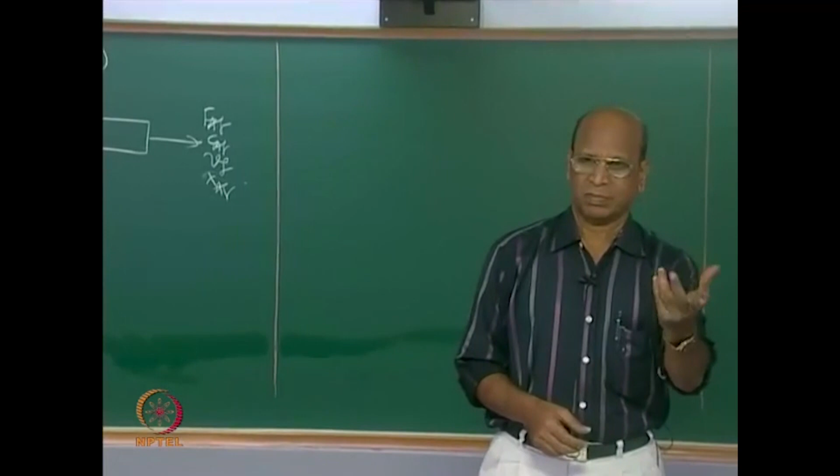Here also I can calculate tau, no? In this also we can calculate what is the residence time required for certain conversion, and residence time is equivalent to volume, correct?

And of course we are talking about only reaction time. When you compare plug flow and batch, you are talking about only reaction time, right? The other times you cannot take. So definitely plug flow is better in that case, because it is continuous. You do not have to discharge, refill, or do all that - once you start, years and years you can run the plug flow reactor all the time. But physically, can you say why both are giving the same result under certain conditions?

And to give you the clue, the condition is constant density system. Under constant density system, why is the performance the same? Can you imagine something? You have to extend your imagination. You already know that plug flow is equivalent to batch under some conditions.

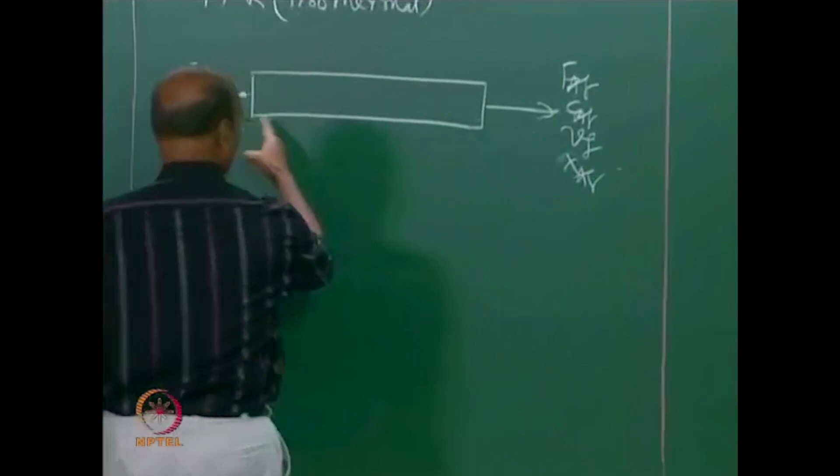But normally you should have a question - that is a batch reactor, this is a continuous flow reactor, why same? Mathematically if you calculate, you will get the same timings or same conversion for a given time. You get that. But did you think a little beyond just that this question will come in the examination, so let me do somehow? Simply, here length by velocity coordinate is replaced by...

Length by velocity will give you what? Time. That time, if it is just replaced in a batch reactor time, both are exactly same. That means the time here with respect to space is equivalent to the time of reaction.

So that means if, let's say, 10 seconds you are here, you can have some conversion, you can find out what is the conversion at this point, and the same 10 seconds if you wait in the batch reactor, if the constant density system is there, you will also get the same conversion. How do you define plug flow?

Same residence time - every molecule spends the same residence time. Here also same. In batch reactor, what will happen? Same. That is the one simple concept.

In batch reactor, you are not allowing those fellows to escape, and you are waiting for either 10 seconds or 20 seconds or 100 seconds. You are arresting them - they have to be there.

Whereas here, by definition, for a certain reaction - say 90% conversion or maybe 80% conversion - to occur, you also need certain time here. And by the definition of plug flow, all the molecules have to spend exactly the same time in the plug flow. Whereas in batch reactor, there is no way for the molecules to escape, so all of them have to spend exactly 10 seconds to get this 90% conversion.

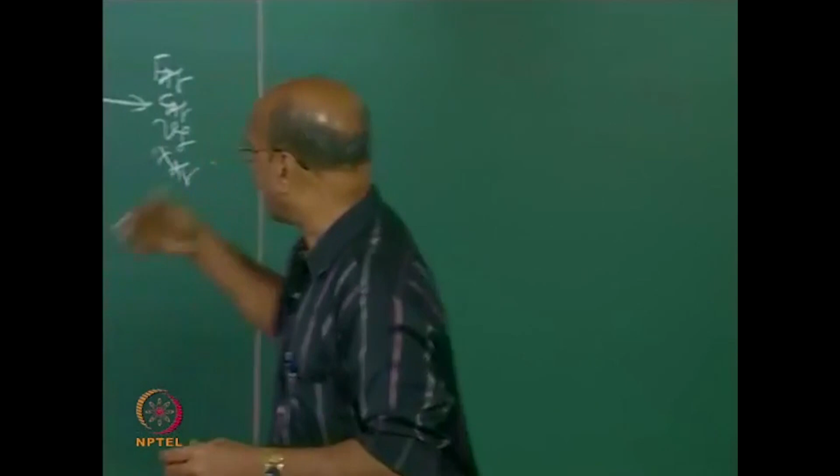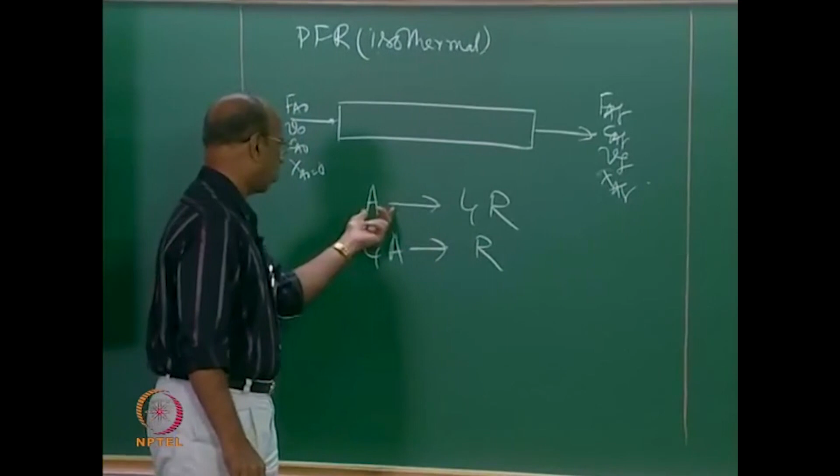So in the variable density system, particularly for gas phase reactions, when there is a difference in moles - that means either 1 mole giving 4 moles, or this may be reverse also - this is also density, change in density, but here you will have less volume at the end, because 4 molecules giving you 1 molecule, whereas here 1 molecule giving 4 moles.

And then you also know that at NTP, STP, 22.4 liters it will occupy - all that we know. So then we can easily calculate under given temperature and pressure conditions what will be the increase in volume. What will happen now inside the plug flow reactor when I have this kind of situation? What will happen?

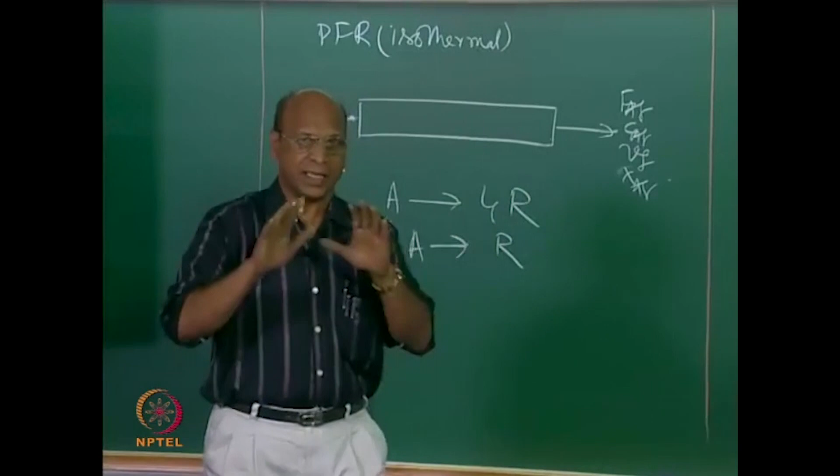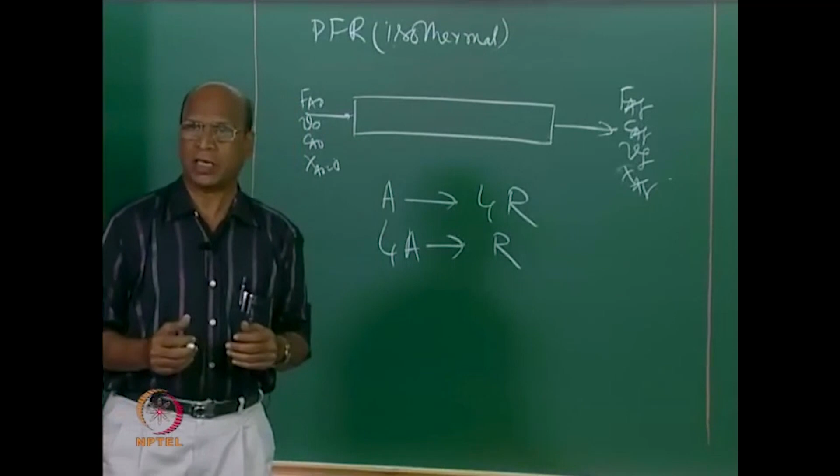Why? Because let us say 1 mole gives 4 moles, suddenly all that volume is not increasing instantly. That volume also depends on how much conversion. Depending on conversion, if I have 10% conversion here, the volume expands so much. You can calculate that. If you go slightly inside, maybe conversion has come to half, for example 50% conversion, you can also find out what is the volume.

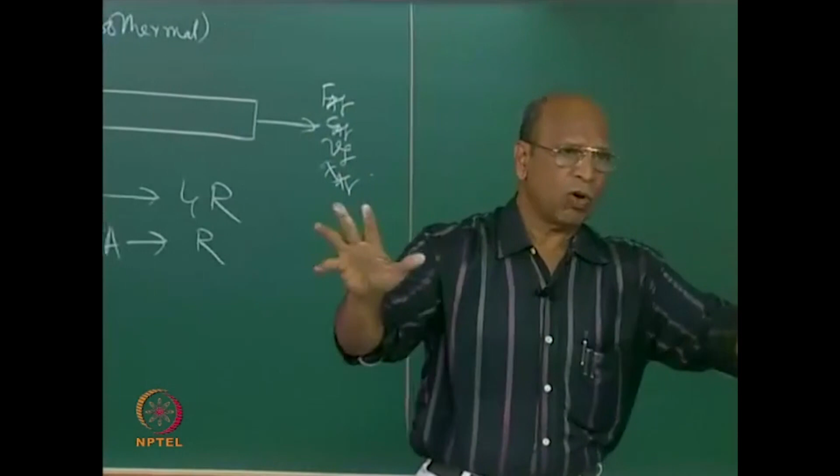That volume, because pressure is constant throughout, has to reflect only in acceleration, right? Because there is a continuous flow, there is a way for these molecules to escape. On the other hand, in a batch reactor, same reaction I conduct. So 1 mole will give me again 4 moles there, no escape, so everything is shut and constant volume, because I am taking a rigid batch reactor, rigid, meaning walls are very, very strong.

So then what will happen? Pressure increases. In fact, that is the technique used by Levenspiel to measure kinetics for gas phase reactions. You can find out, depending on conversion, what is the increase in pressure, not volume, batch reactor total pressure. Now from total pressure, if you know the components, you can find out partial pressure. So using partial pressures and time, you can also find out the kinetics, whether the reaction is first order or zero order or no order at all, and the format of the rate equation you can get from that data.

That is why beautifully it is used, and it is also possible, it is a crazy idea, to have the variable volume batch reactor. How do I do that? I will take a balloon where the elasticity is very, very high, so it easily expands.

So when I put this 1 mole and have the conditions for the reaction, at the end of the reaction, if I wait for almost 100%, what will be the volume of the balloon now? 4 times, freely expanding, without any resistance. So even that information can be used for finding out kinetics.

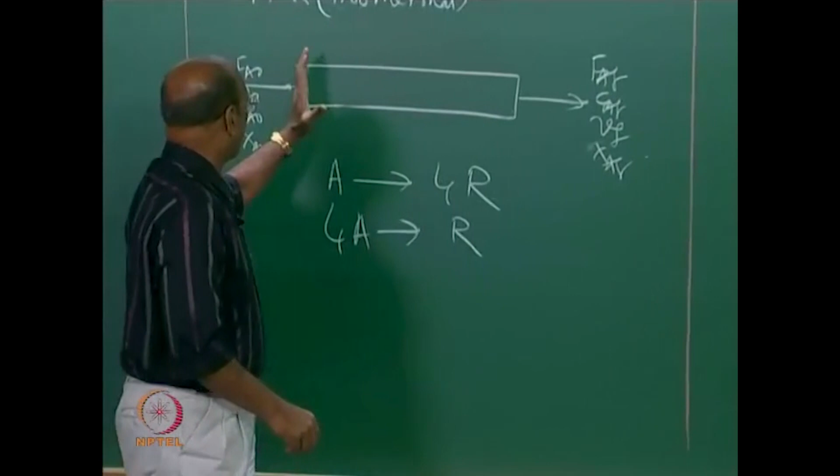But here for our discussion, what we have to see is, when I have the gas phase reaction in plug flow, the gas expands and then it moves faster. So when it is moving faster, the residence time of those molecules will be less. So for a given volume, conversion will be less. For a given volume means for a given τ value.

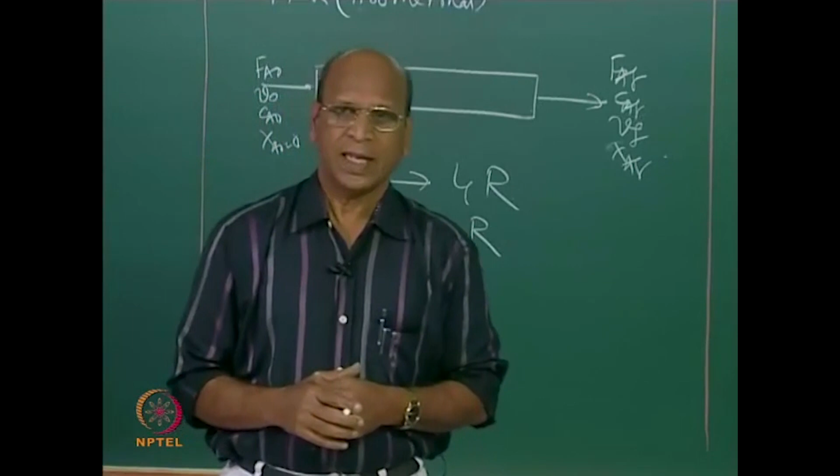So that also you should have calculated: that means for variable volume, what is the conversion, and for a given time, or for constant volume, what is the conversion. Because in variable volume, particularly when you have 1 mole giving 4 moles, the gas expands. What happens to concentration? It decreases. When concentration decreases, rate of reaction will be less. So when the rate of reaction is less, then more time is needed.

You see, you don't need any expressions at all, you don't have to write an equation for each and everything. First, I think like a story you have to discuss it. Then if you want to exactly find out what is the exact conversion, or what is the exact time for a given conversion, that means when numbers come into play, then you have to use mathematics. Otherwise, to explain the subject I don't need mathematics.

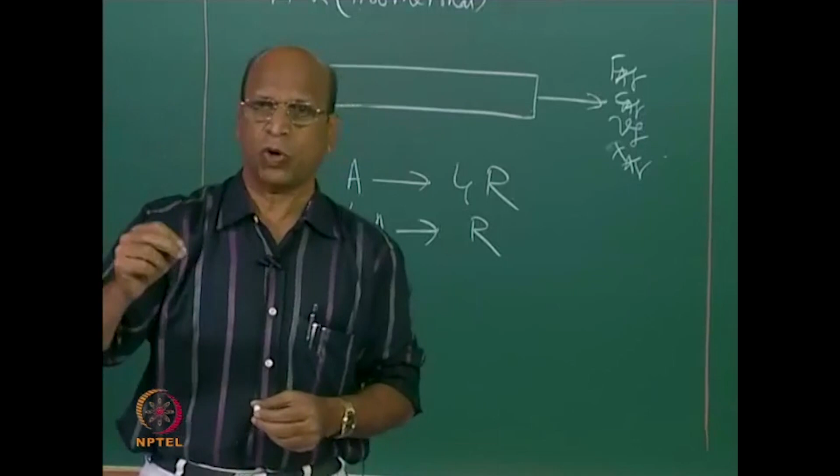But please remember, in engineering mathematics plays a great role, because every engineer has to quantify anything. At the end, when you are saying that my reactor volume is 1 meter cubed, people will ask you why. You cannot simply say, like only gods can say, use 1 meter cubed, and you can't question them because they are gods.

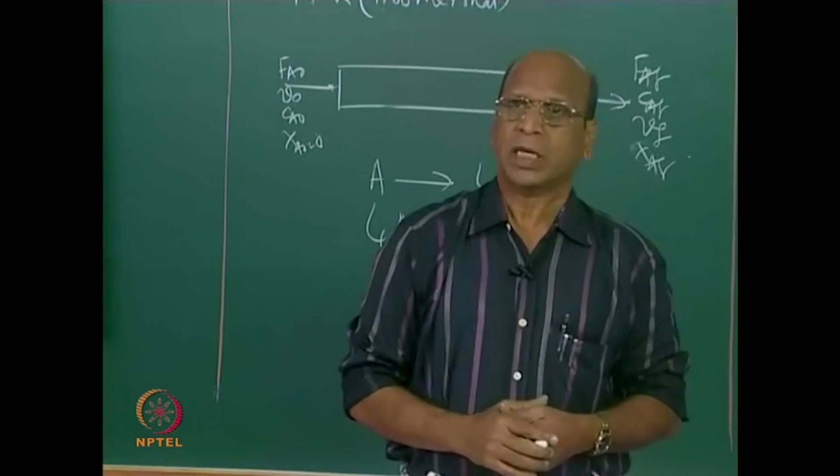But if I give that, 100 questions will come: sir, why 1 meter cubed? Like I already told you, no, I told 7 meter cubed, you say 0.7 meter cubed, you question me. That means to prove it I need mathematics, and then I have to say whether you are right or I am right. For that, mathematics comes into picture. That is why mathematics and engineering are inseparable. Medicine can escape this to some extent. Otherwise, there is also a tremendous amount of mathematics in medicine as well.

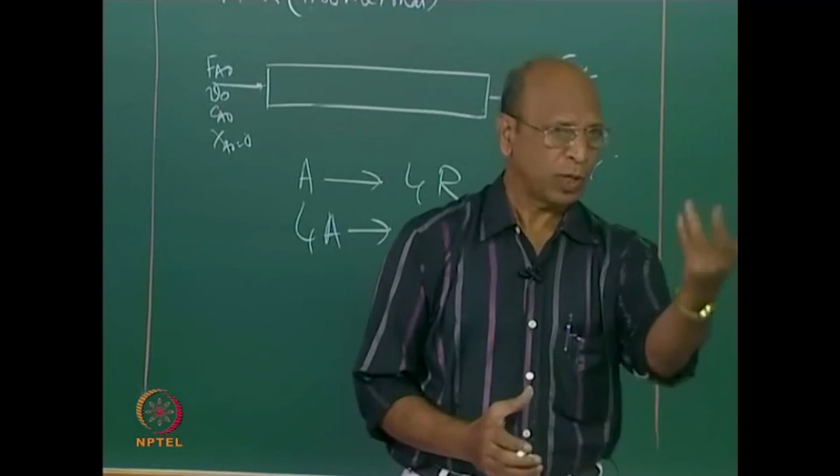When they go to research level, to give an aspirin tablet, we don't need any mathematics, because we also know when to take an aspirin tablet, all of us, even without being doctors. So that is why the mathematics part comes only when you want to quantify. Please remember that as engineers, quantification is a must.

I am not talking about a reactor, anything. I think the heat exchanger area is, say, 10 meter square. How do you get 10 meter square? You have to calculate. You have the heat transfer design equations, right? Same thing for a distillation column, anywhere you go, mathematics automatically comes, because you have to finally tell that this is the diameter, this is the height, this is the composition, all that.

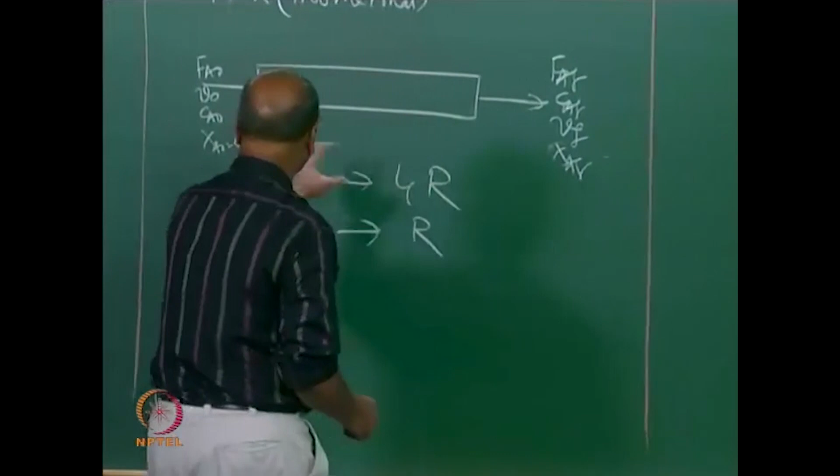Good, okay. So now I think you know the difference between the batch reactor, when you will have different conversions for a given volume, or when you have the same conversions. So that is one information which I want to tell you.

So the other information is the design expression for this now. How do you write the design expression depends on what kind of system you have. Have you heard of what is called a distributed parameter system and lumped parameter system?

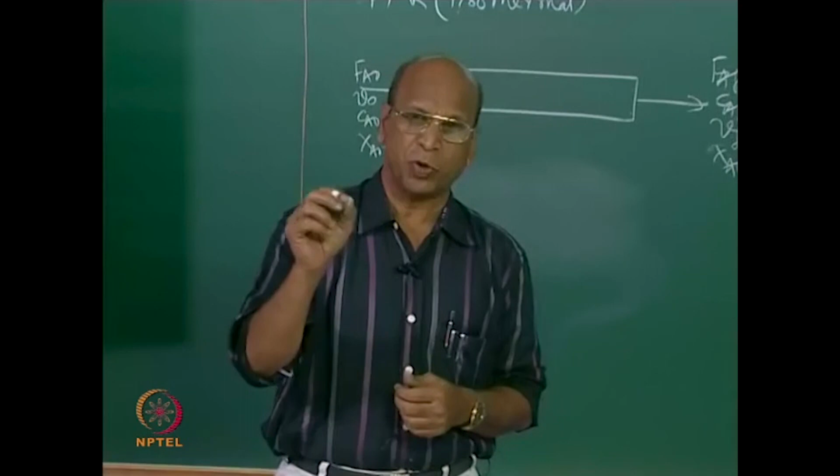Okay, this comes as distributed or lumped. What is distributing there? I want you to have perfect understanding, so that is why I am asking, what is distributing there? The concentration, and if it is non-isothermal, temperature is distributing from this end to that end.

Whereas in a mixed flow reactor, when you want to write the balance, you only know what is entering at the inlet, and what is leaving at the outlet. But in between, if you want to write the balance, you cannot, because there is no change you can see. There is no change between inlet and outlet also, it will have exactly the same conversion as inside.

In fact, that is the approach taken by the entire BSL. You know who is BSL? You don't know BSL? That you should know. Only feebly telling about Stewart... okay, but with louder voice. All of you have used Bird, Stewart, Lightfoot?

What is the name of the book? Transport Phenomena. Where are these people from? University of Wisconsin, US. Okay, good. And when they were very young, they wrote that book. I think all of them were around 30-35. And they changed the thinking of all engineers, not only chemical engineers, even other engineers' thinking they have changed.

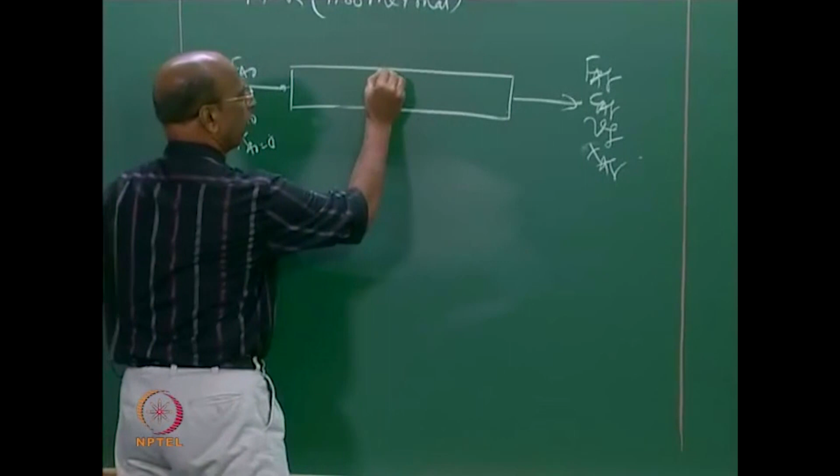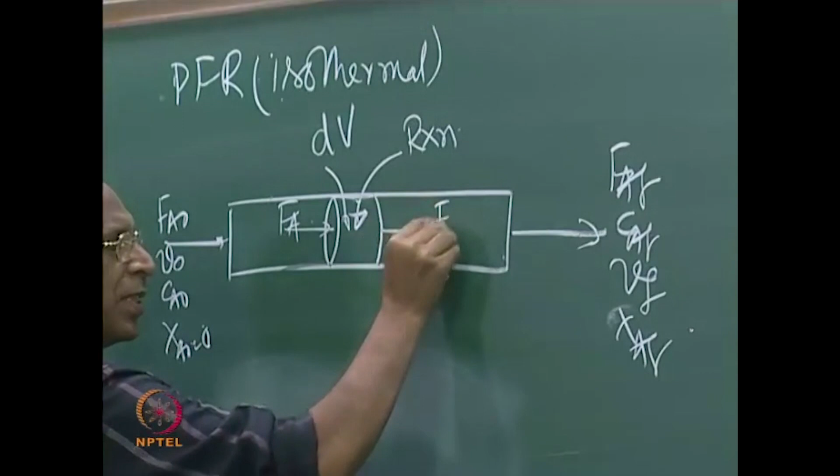This is a small element, though I am showing it big here. So, we have to write what is entering, what is leaving, what is the reaction in that. We call this volume dV. This is Fa, not Fa naught, somewhere inside I am taking. So this will be Fa plus dFA, that is very simple.

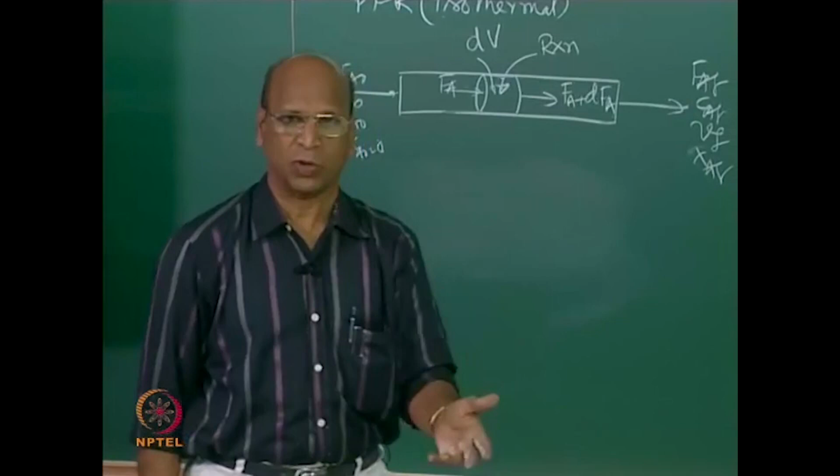Now we have to write the overall universal balance. We are only writing for isothermal, so we are only writing for mass, and when you talk mass you always have to talk about one particular component. Please remember, I am repeating many times. Whereas for heat transfer, everything is together, the entire heat.

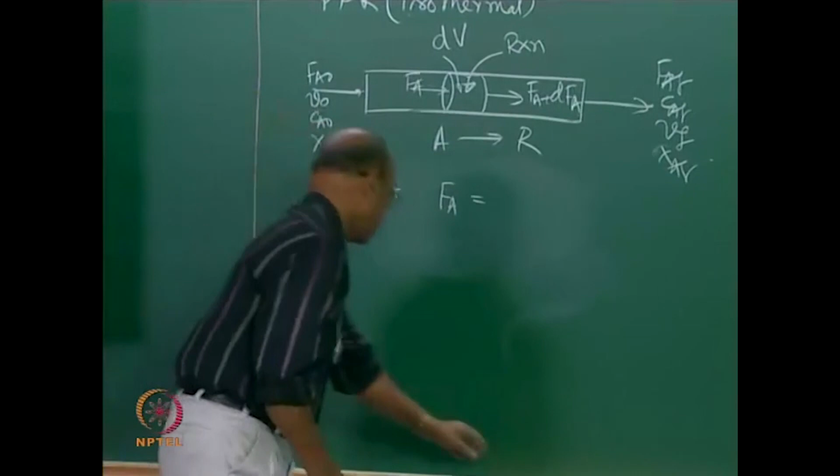So now that universal equation for us, mass balance for A, if I have a reaction A going to R, just imagining for easy writing. So MB for A is: what is entering this element, Fa. First, this is input equal to output plus, short form, reaction plus accumulation.

All reaction engineers are steady state people, all process control engineers are unsteady state people, because they do not know what is steady state. So that is why we happily assume that is not there.

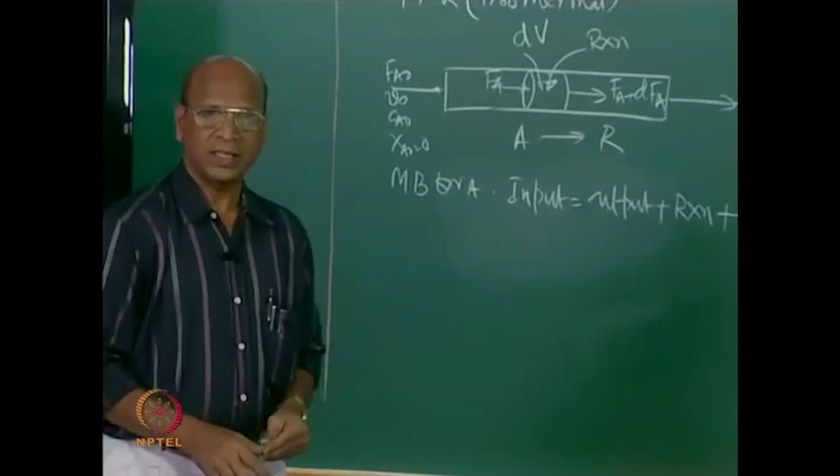So now we have only three terms: input, output, reaction. Of course, sometimes we also have to use accumulation, particularly when starting the reactor first, you should know at what time steady state comes. For that you have to solve, and depending on the equation you get an unsteady partial differential equation or an ordinary differential equation, but that will come later when we talk about residence time distribution. This is one of the simplest equations you are going to get.

So this moles, MB for A, means we are also talking about moles per time, maybe second. This is better to write in the beginning. So now Fa, according to our notation, is moles per time, moles per second for example, and v naught is meter cubed per second. This is called volumetric flow rate, this is called molar flow rate, and Ca naught is moles per meter cube.

They are not universal units. Please don't scold me when I give a problem in kilomoles, because I can give either kilomoles, moles, or lb moles, or meter cubed, feet cubed, centimeter cubed, or millimeter cubed, whatever. So this is only per unit volume, and Xa naught is conversion where there are no units. Similarly on this side also you have the same thing, but we are now balancing moles per second.

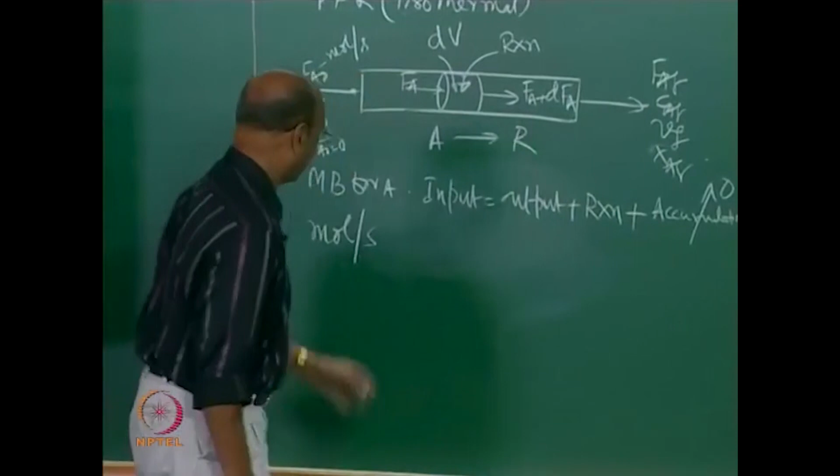So I have Fa equal to Fa plus dFa, that is the change, either positive or negative, that will come automatically. Plus you have the reaction, where is the reaction taking place? That reaction is taking place within this volume. And what are the units of reaction rate?

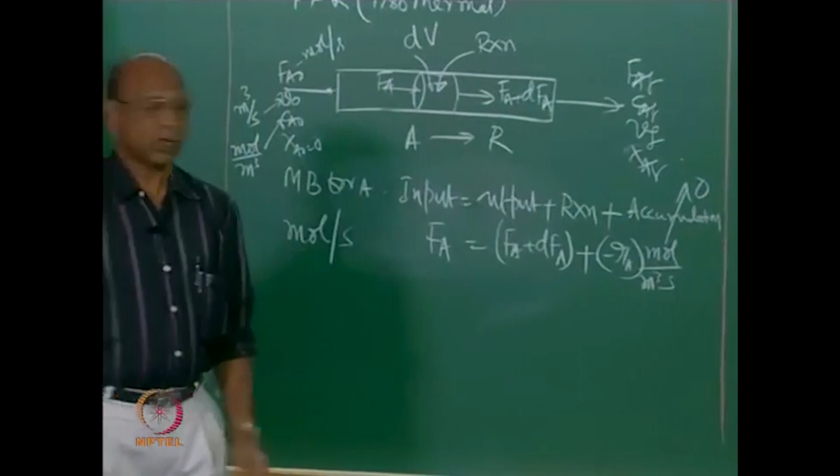Because homogeneous we are talking right now, so moles per unit volume per time. That is why I will write our rate as minus Ra, because we always write A as the key component. This is minus Ra, moles per meter cubed per second, into volume which is dV, dV is meter cubed. So meter cubed gets cancelled, and I will have the entire term only in moles per second.

So my balance is right, good. Now this Fa, both are same, so I can bring here minus dFa equal to minus Ra into dV. If I call this equation 1, this is equation 2, this is equation 3. In fact, I can simply write this equation as dFa by dV equal to minus Ra.

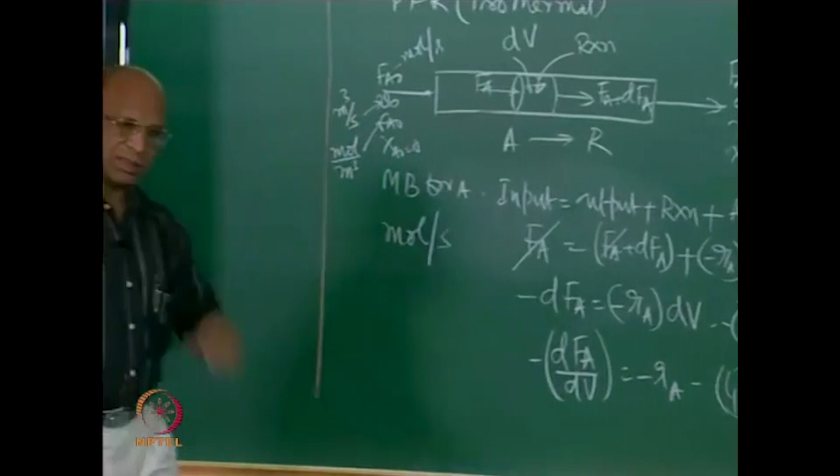Writing this equation is not useful to me, because I would like to put this equation in terms of easily measurable values. Fa is not that easily measurable, but I want to measure only in terms of concentrations or conversions. Now before going to that, let me do that, and then afterwards we will simplify this.

So now for a flow system, for a batch reactor, how do you define conversion? For batch, how did you define it? I think we also told this: Na naught minus Na. Na naught is initial moles, minus Na is moles at any time. So Na naught minus Na gives you moles converted, divided by initial moles.

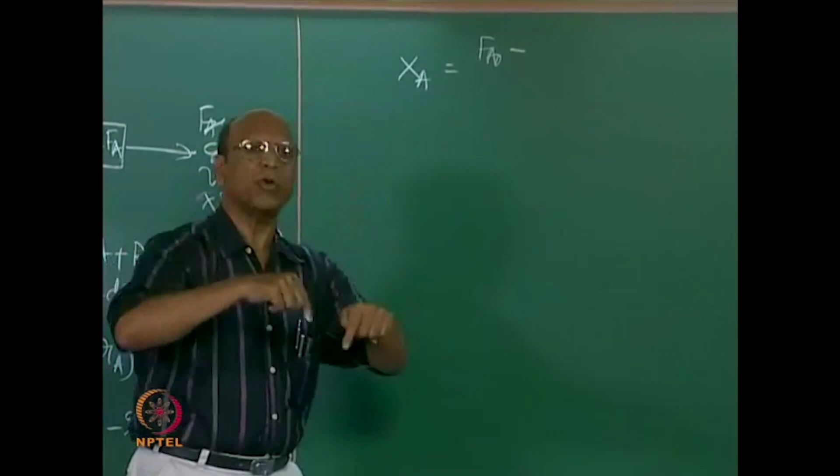But for a flow system, we write the same thing as Fa naught, that is moles per time. They are simply moles you are taking, here per unit time you are taking. So Fa naught minus Fa by Fa naught, this is the definition of Xa. Now from this can you calculate what is dFa?

dFa differentiation, how much, what do you get? Minus Fa naught into dxa. You brought this one here, into minus you put there, I think I won't put minus here: minus dFa equals Fa naught dxa. So now this is equation 6, these are very simple, but still I am explaining. Now substitute that in equation 3, what do you get?

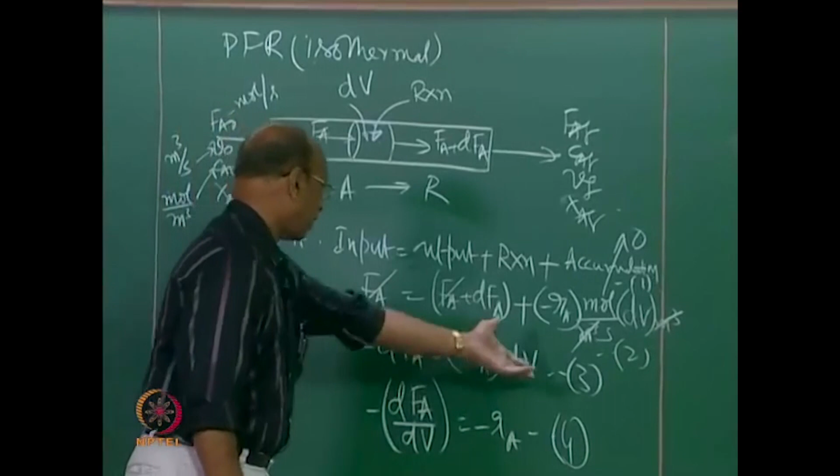Substituting equation 6 in equation 3, what you get, minus dFa, Fa naught dXa, equal to minus Ra dV. So this is the basic equation which we use many times, particularly for non-isothermal systems in differential form.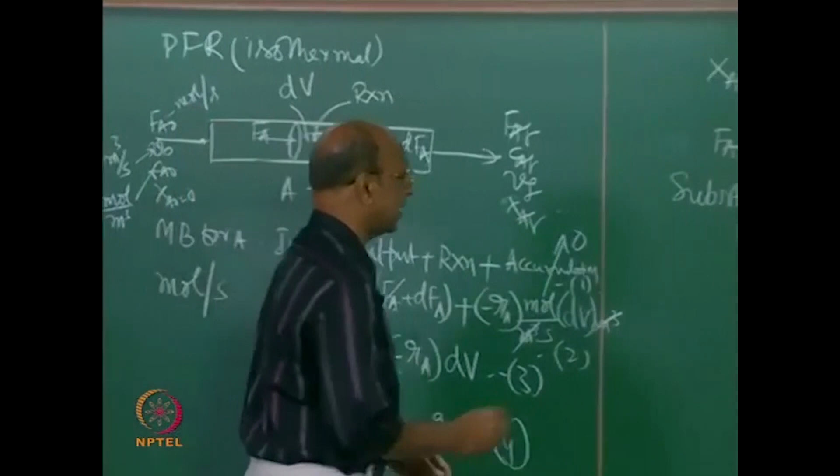This is the design equation in differential form. So now we can integrate this. When integrating, we change this to dV by Fa naught equal to dXa by minus Ra, and integrate.

So what are the limits? 0 to V and 0 to Xa. So 0 to V is simply V by Fa naught, equal to integral 0 to Xa of dXa by minus Ra. So this is equation 8, the design expression for PFR, the simplest design expression.

Just for comparison, we have written for batch reactor: T by Ca naught equal to the same dXa by minus Ra. Just for comparison, right, good. So that is the one.

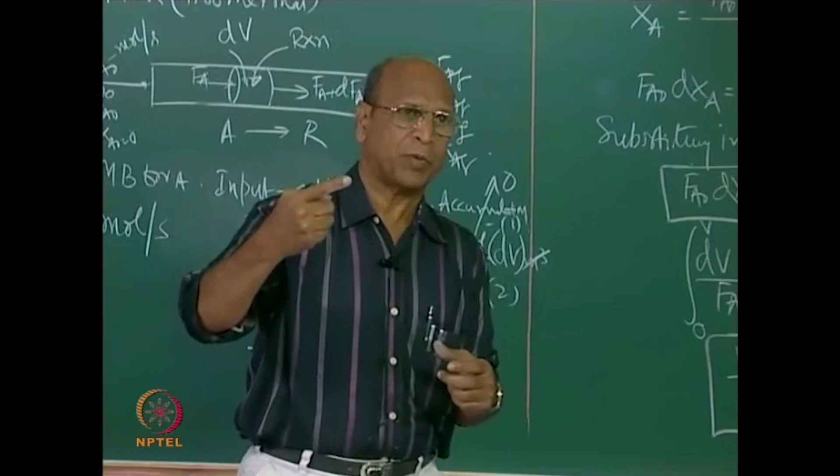So now why has this equation become so simple? This is because I assumed I have plug flow. But you should have questioned me: sir, what will happen if you do not assume plug flow? What would have happened?

If there is no plug flow, what is there in the system? Concentration will change. It is a flow system, with input and output, but I am not assuming that I have plug flow. If I do not assume plug flow, then what is the non-ideality that comes?

The first non-ideality that comes is axial mixing. The velocity fluctuations, we are not allowing those fluctuations now here. So the moment we have the velocity fluctuations, how do they look like? They look like this.

Now, to bring the point here, I can also write Fa in terms of Ca. Can you write that? Molar flow rate in terms of concentration and volumetric flow rate. So that means I can also write Fa as volumetric flow rate V into Ca naught, Ca.

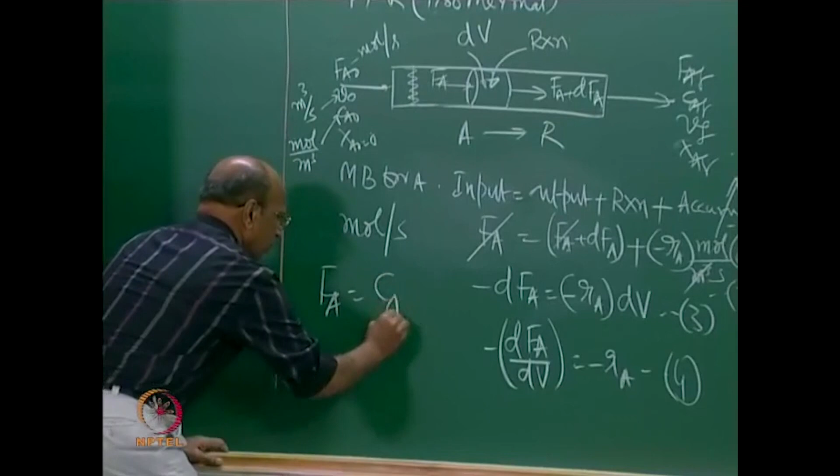Okay, I think here itself I will write. You can check, I think I am worried about Arya and Chaya, whether you are chemistry or chemical engineering. Yeah, are you able to follow? Okay, this concentration you can see, I think we should help them. So I am just telling even these things. So this Ca, what are the units?

Concentration is always expressed per unit volume, so moles per meter cube. And V is meter cube per second. What are the units of Fa? Moles per second. So that means even this I can replace by C and V. But we wrote directly that because that is what the mass balance gives me, I do not have to use two variables.

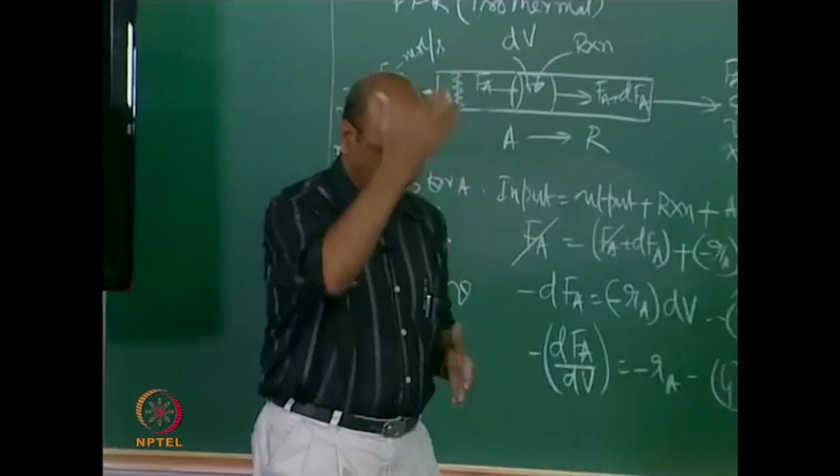But my biggest problem now is, by assuming plug flow, what is the concentration across this? Uniform Ca. If I do not assume that, I do not have uniform Ca, so what am I writing here for Fa? This Fa indirectly involves Ca and V, and when Ca is not uniform, how can I write that? What concentration do I take? Concentration may be different here, different here, different at each cross section, because it is not uniform across the cross section.

So then what concentration can I use? What average? How do I know the average? How do you get the profile? So finally you can do all that, but that is a difficult task.

But as an engineer, the simplest assumption - really we have to appreciate Professor Denbigh, who assumed these things, even mixed flow, he is the person who did that. During the Second World War, he was working in an explosive factory, and he was the person who said that if you use plug flow reactors, we will not be here in the company, because temperature control is not that very good in plug flow. So that is why CSTRs we have to use, and he started using 2 CSTRs and 3 CSTRs to produce all explosives.

Okay, and later he became a great philosopher. Now he is still there, I think, but he stopped thinking about research. But I told you that Chemical Equilibrium, Principles of Chemical Equilibrium, that book contains wonderful information about entropy and all that. The moment you talk about entropy, immediately you can see God, because if you don't understand entropy, you don't understand God. Both are equivalent. That's why now he is trying to find out where God is through entropy. He stopped doing basic research.

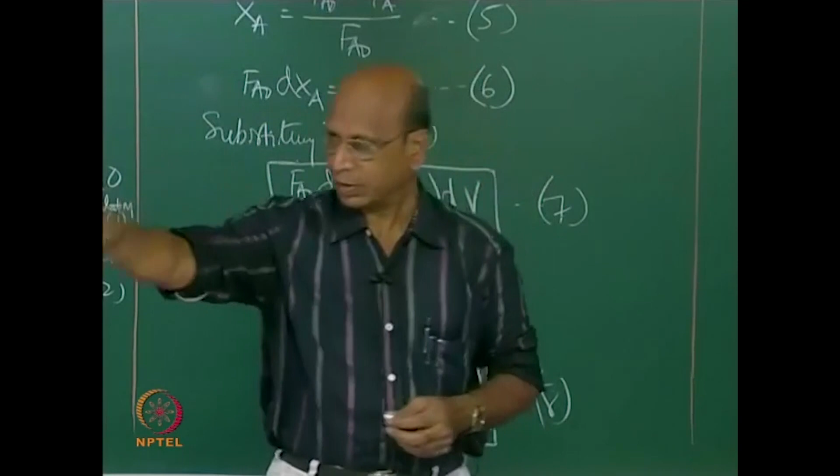If you read throughout his papers, I think it's beautiful logic only, not mathematics. That is why you have to read that book, Chemical Reactor Theory, an introduction. Even in optimization, which has the maximum mathematics in chemical engineering, optimization of chemical reactors using various methods, even there, through logic, he found conditions for optimality. Later, many people used different mathematical techniques, and finally they said that what he used intuitively was correct. Some conditions, and the non-isothermal case, I will tell you those things.

So that is the beauty of assuming plug flow: the moment I don't assume that, I will give you an example. The first thing I want to tell you is, you don't know how to write the material balance if you don't first assume plug flow, right? But you can also calculate and quantify things. Take only one parameter, called axial mixing.

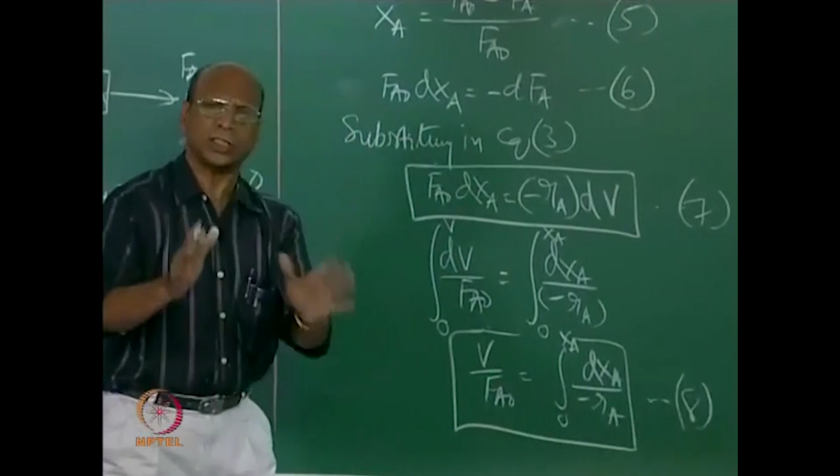If you take axial mixing into account, and then derive the equation to get the equation for conversion, for first order, what is the equation for conversion here? First order, constant density system. So minus RA equals K CA. Substitute that into this equation: V by Fa naught equals integral from 0 to XA of dXA by K CA.

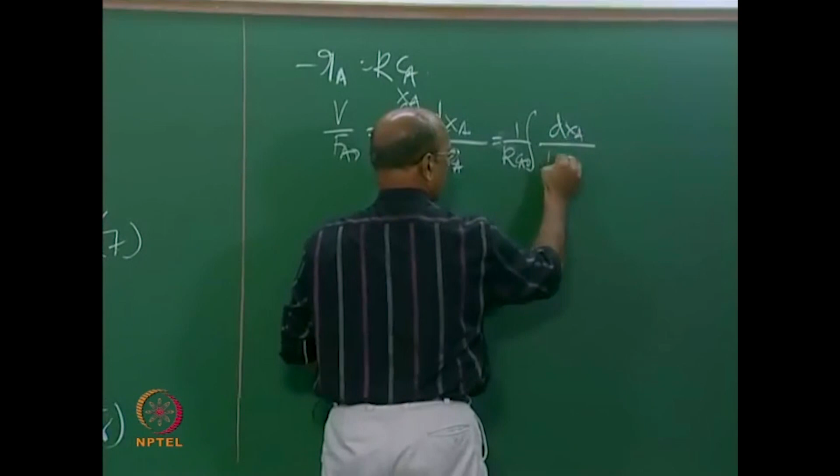Can I integrate this directly? You have to write that in terms of XA. So I have to write: constants I take out, K into CA naught, dXA. It is a constant density system, that is why we said CA equals CA naught into 1 minus XA. So now this equals minus log of 1 minus XA.

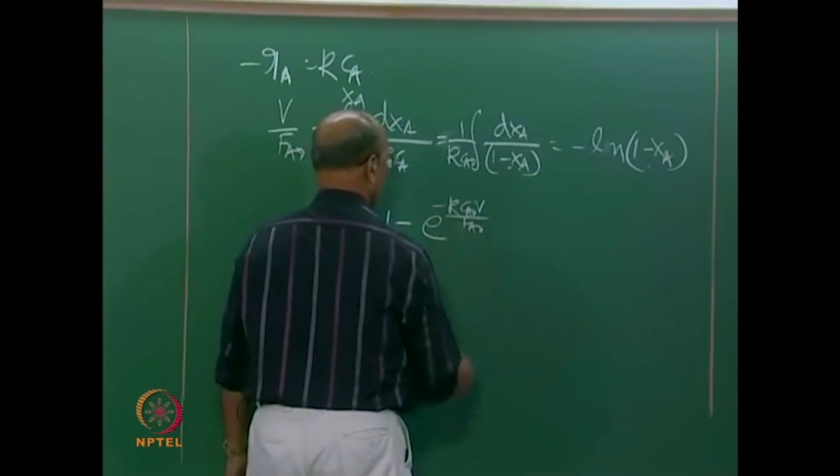So if I calculate XA, it is 1 minus e power minus K CA naught V by Fa naught. Actually, I don't have to use tau. I think the natural design expression is, of course, time if you want to write it that way, but the natural design quantity is V, volume. You directly get the volume itself from these equations. Later, if you want to convert, okay.

So what is tau here then? In fact, Fa naught by CA naught is V (volumetric flow rate). So V by V is tau. Then it becomes K tau. It is easier to remember K tau instead of two other variables, because we should not strain our mind unnecessarily.

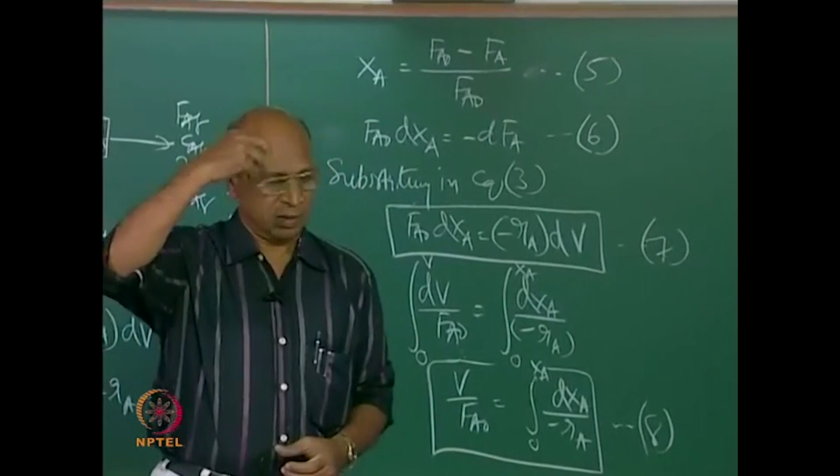Why remember unnecessary things? So if I divide by CA naught, then Fa naught by CA naught gives me the volumetric flow rate, and volume by volumetric flow rate gives me tau. So it becomes K into tau, and this becomes e power minus K tau, where tau is defined as volume by volumetric flow rate. Are you able to see here? So that is nothing but, in terms of, this will be V CA naught by Fa naught.

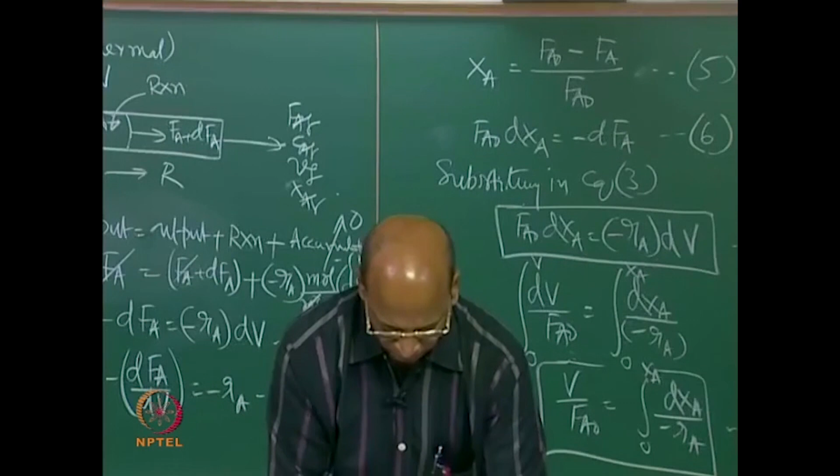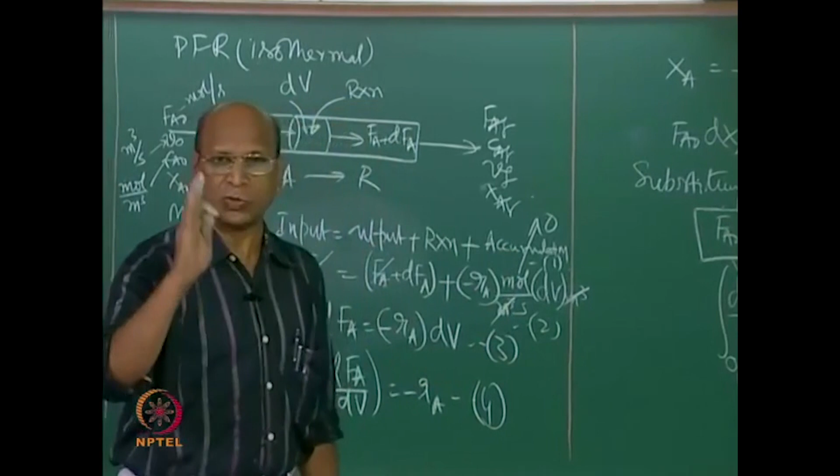Now, if you do not assume this, you will not get a very simple equation. If you do not assume plug flow and instead assume the first simplest non-ideality, axial mixing, we are not even taking radial mixing. Axial mixing is one factor, but radial mixing can also be non-uniform. So now we are taking only axial mixing as one variable first. If I take only that, that means I don't have plug flow, but I have axial mixing coming in as one of the non-idealities, because it is not ideal. We call plug flow ideal because we assume that is the ideality that should be there, to simplify the mathematics, that's very simple.

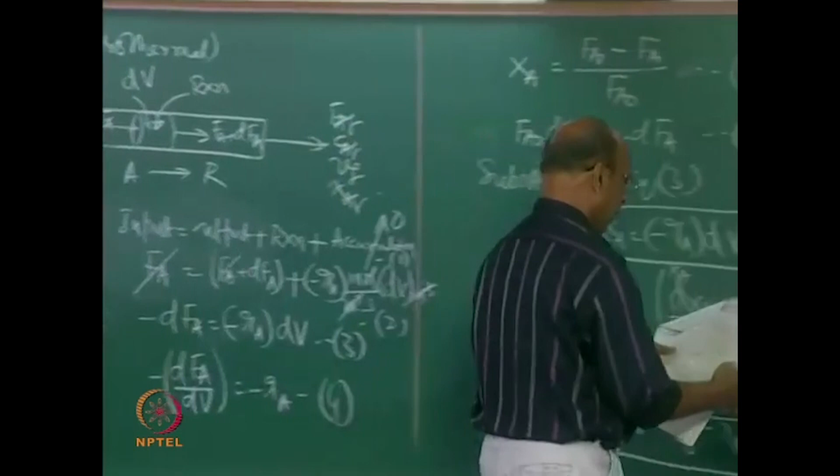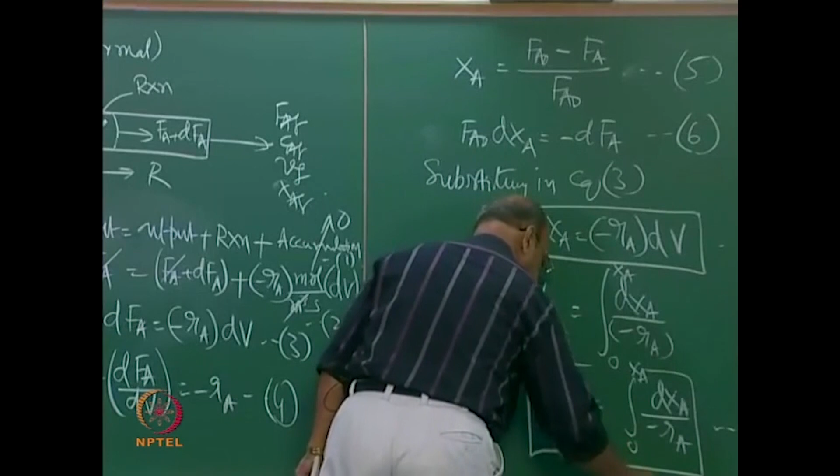Now, with this axial mixing model, compared to the plug flow model we used earlier, again for first order, same first order constant density system, I simply write K CA, constant density system, A going to R. If I use that, then the equation which I get is this.

Okay, for comparison, let me write this: 1 minus XA equal to... first I have to draw this line. 4A exponential of UL by 2D, whole thing divided by 1 plus A whole square, exponential A by 2 UL by D, minus 1 minus A square, again exponential by e to the power minus A by 2 UL by D.

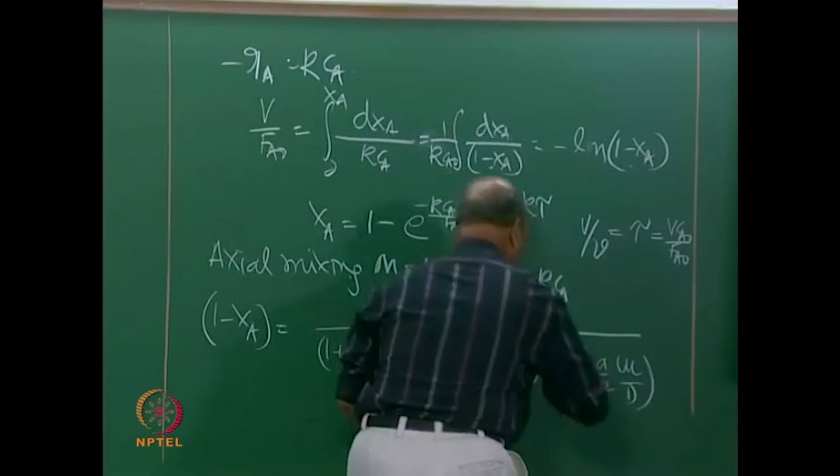Very simple expression, no? When compared to this, if I write this as 1 minus XA, this will simply be e power minus k tau. So now this e power minus k tau, 1 minus e power minus k tau.

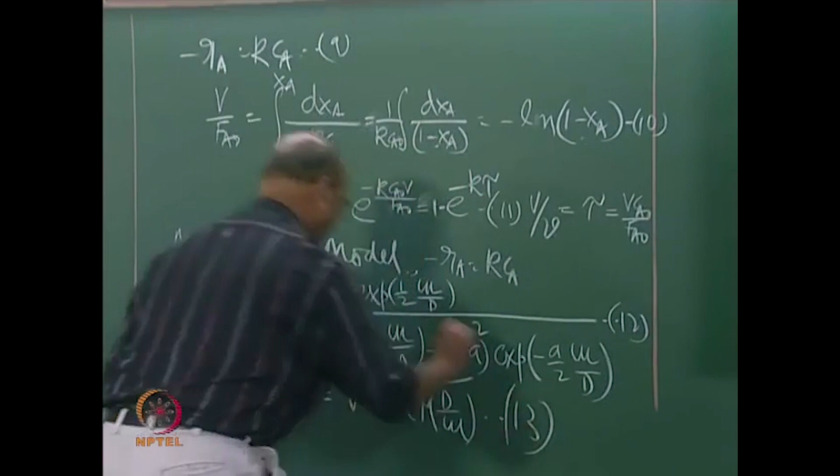But it's not over, because what is A? You do not know it. Now I have another equation for a: a equal to square root of 1 plus k tau d by UL, that is the equation. We lost the numbers somewhere - this is 9, 10, 11, 12, 13.

So that is the equation we have to use if we consider only one parameter - that is, the axial dispersion is always imagined as essentially plug flow, not an ideal one, but with some fluctuations over that velocity profile.

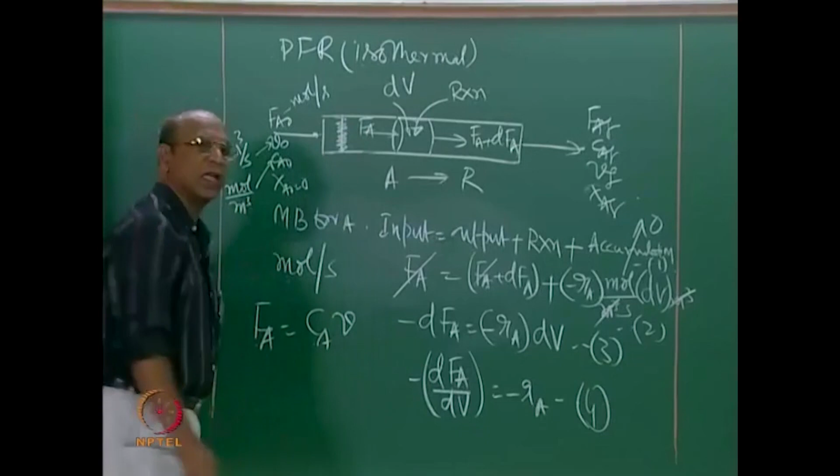Okay, that will change. How do I write this? Because now what is happening is, earlier when I assumed this - I think I have to discuss earlier when I assumed that I have only plug flow. What mode is the flow inside the reactor?

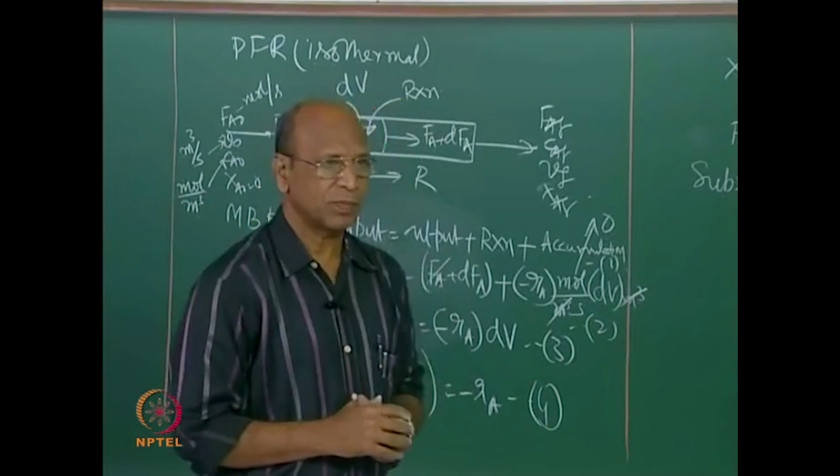Because flow can happen by diffusion and convection. Diffusion is by concentration difference, and convection is only by velocity.

So that means we have now two terms: one is convective velocity, so we will get convective flux plus diffusion flux. That is the total flux.

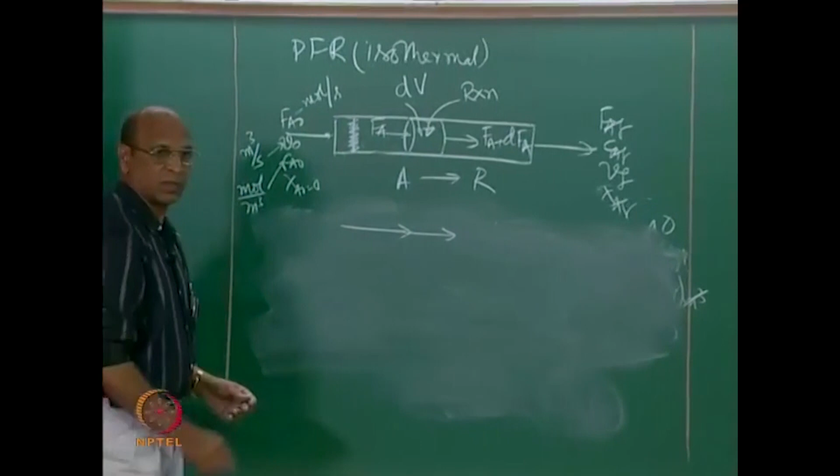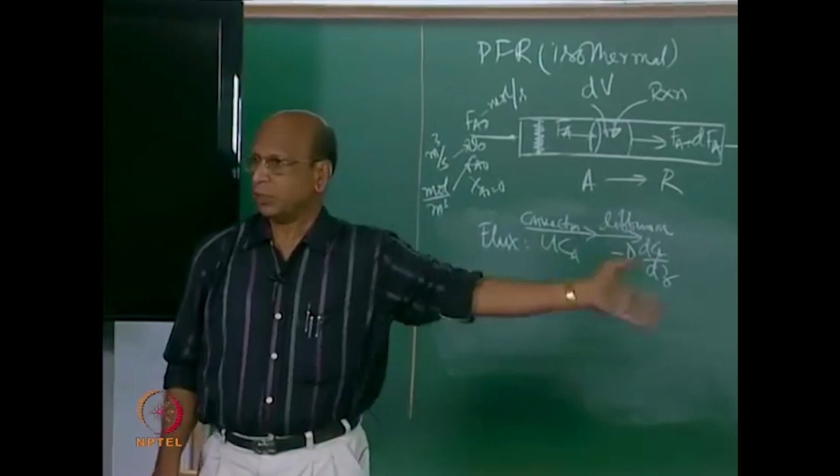I'll give you a simple example. So now I have diffusion as well as convection, both. This is convection plus this is diffusion. Convection is written as U into Ca - that's the flux. This is minus D - here I can take Z, if I take that as Z or X, whatever. So this is the diffusion flux.

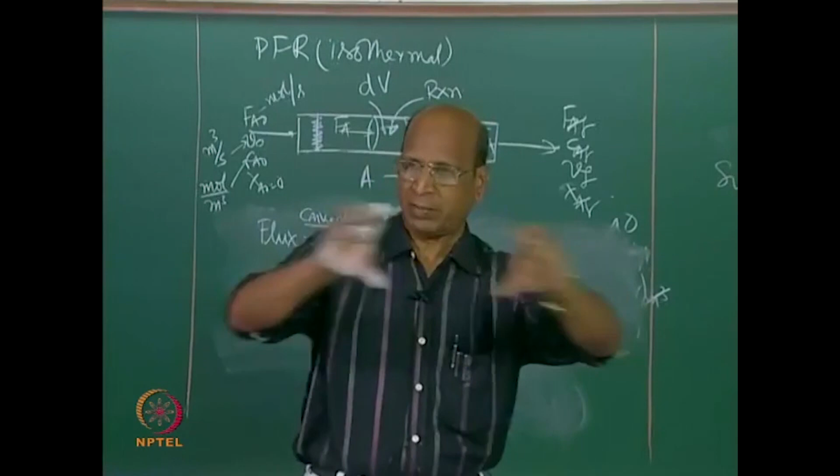So at this point, I have to write this as the flux flow. You see here I wrote moles per time. If I take per unit cross sectional area - since cross sectional area is not changing, that's why we are taking it, because it's the same diameter. What is entering here, the flux leaving there, and then what is the reaction inside - so correspondingly I have to use this dV to get moles per time again. That's why this is the flux which I have to write here.

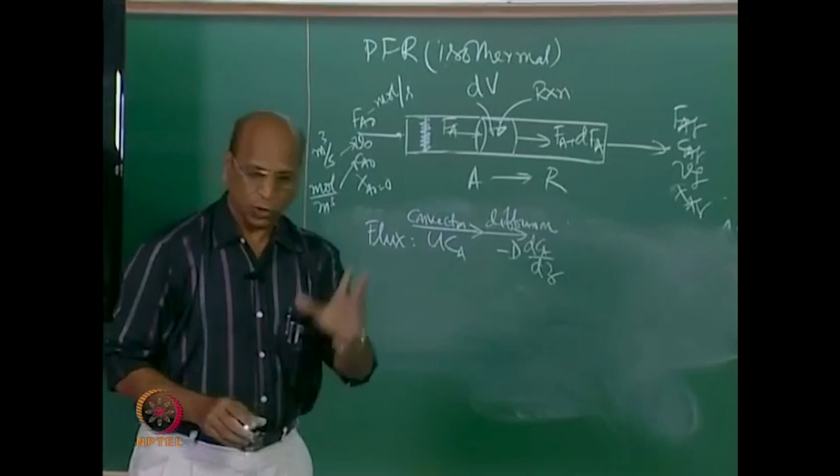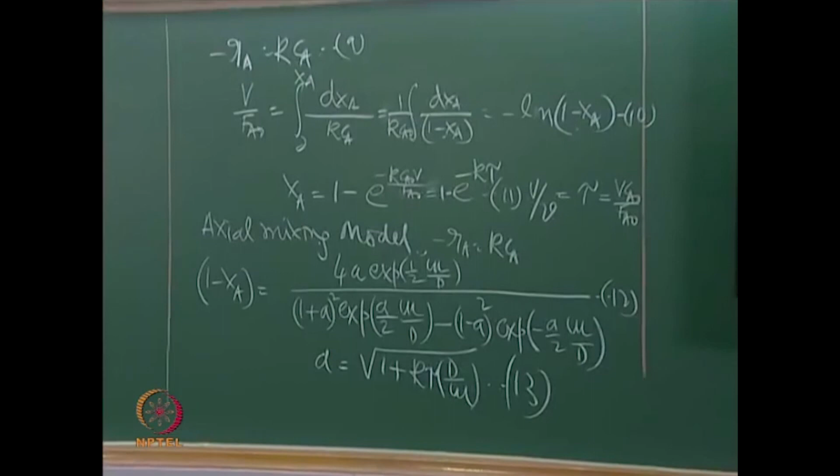So these are the two terms I have to use for solving the equation, and the differential equation you get by taking this reaction and diffusion together is this: U dCA by dZ, this is the convective term, minus D d square Ca by dZ square, plus K into Ca if it is first order reaction, equal to 0.

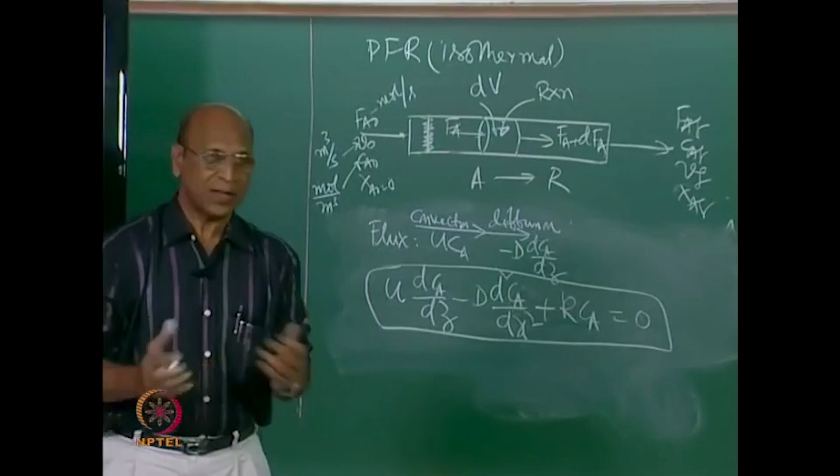Okay, what am I trying to tell now? Axial dispersion - see the earlier one is the axial dispersion model only, but why am I telling you the axial dispersion model at this point of time now? To appreciate the beauty in the assumption of plug flow. So what is the differential equation we got for plug flow - pure plug flow?

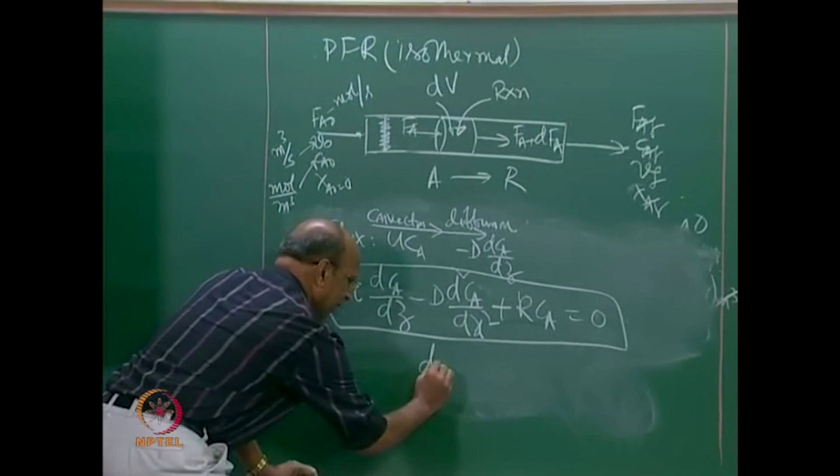Yeah, you see that dV, what is that? dFA by dV equal to minus RA. So this is the differential equation for ideal plug flow.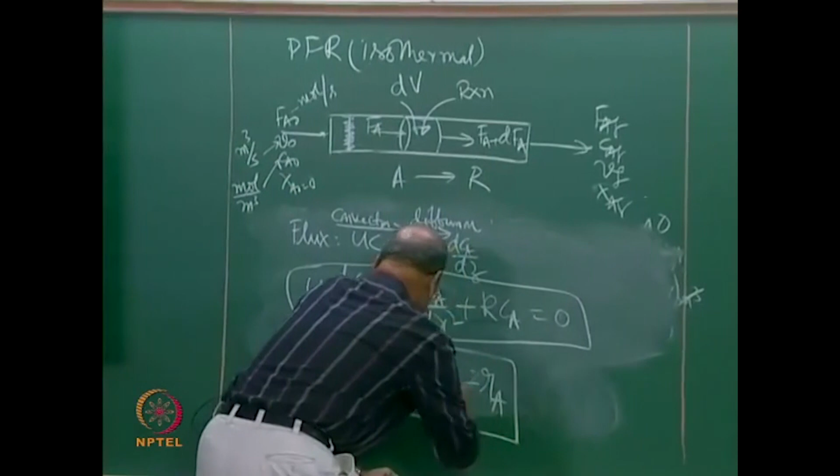I can write this in terms of conversions and concentrations also. This FA is nothing but V into Ca. If I take V as constant, this can also be written as V dCA by dV equal to minus RA.

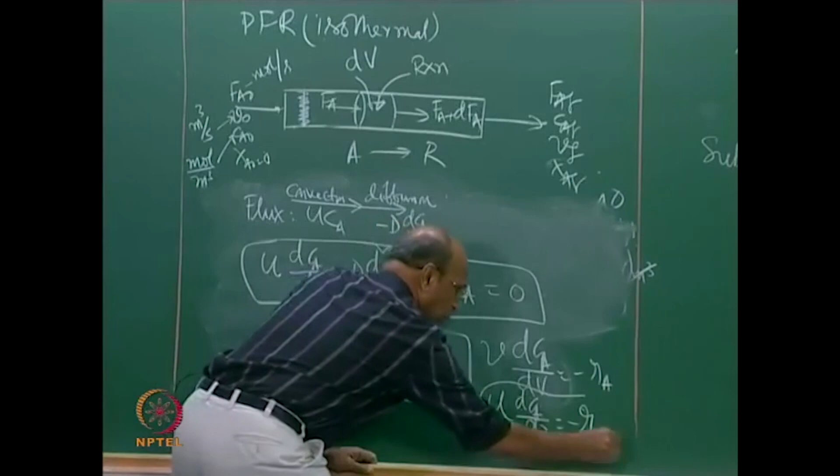Now if I divide by the cross sectional area of this and this - very simply, this will give velocity, and what about this volume element? I'm now dividing by cross sectional area. So now this is dCA by dZ equal to minus RA. This is what I want to prove - how simple this equation is, whereas this equation, this term...

So to avoid this, first we are assuming that we have ideal plug flow. So all this last 10 minutes discussion is just to appreciate the assumption of plug flow. So for that, to give an example, because an example will give you a very clear picture of what are the complications if you don't assume plug flow. The complication is this.

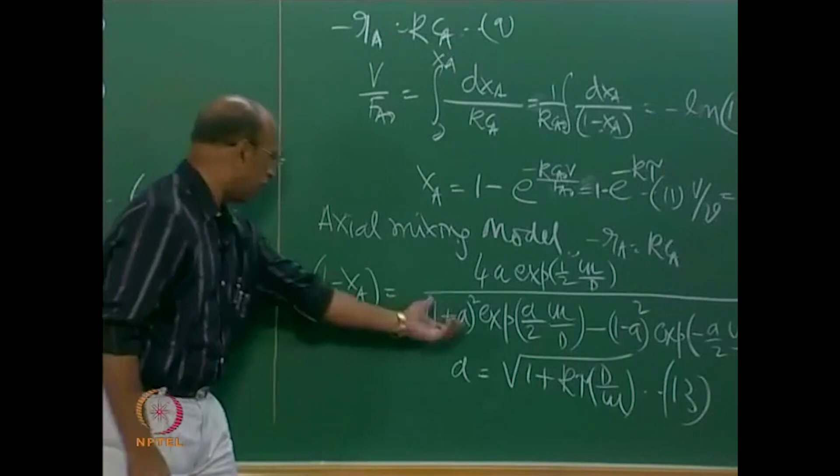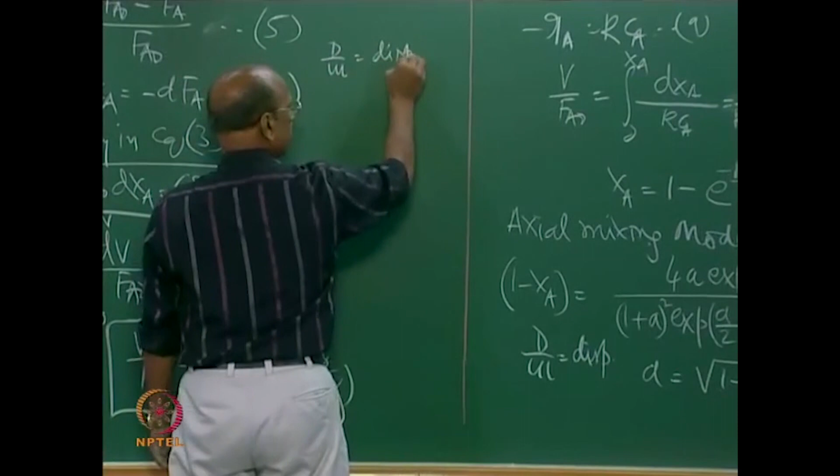This is the equation for calculating conversion given volume. This is called the dispersion number. D by UL is called the dispersion number. D by UL equal to dispersion number. And the inverse of this, if people use this, is called the Peclet number, UL by D. That will tell me what the dispersion will be.

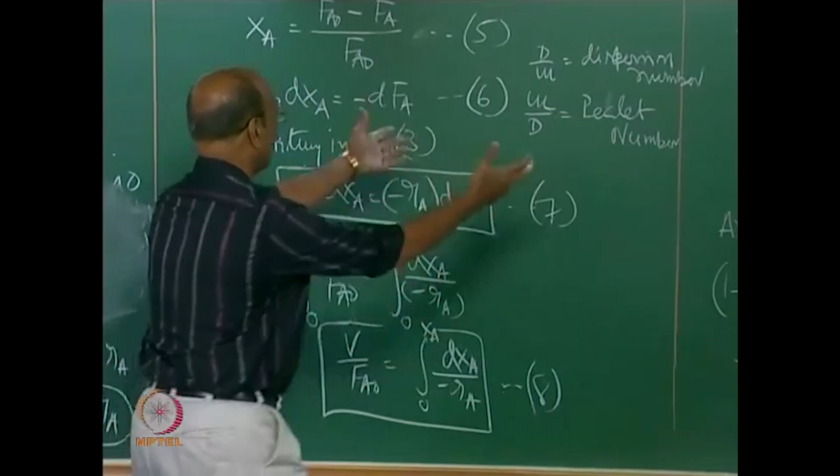For example, when D by UL equal to 0, what is the system? Plug flow. When D by UL equal to infinity, mixed flow, CSTR. When Peclet number equal to 0, because diffusivity is infinity, that is mixed flow. And when Peclet number equal to infinity, plug flow, because diffusivity is 0. So you can get all the extremes by these two numbers.

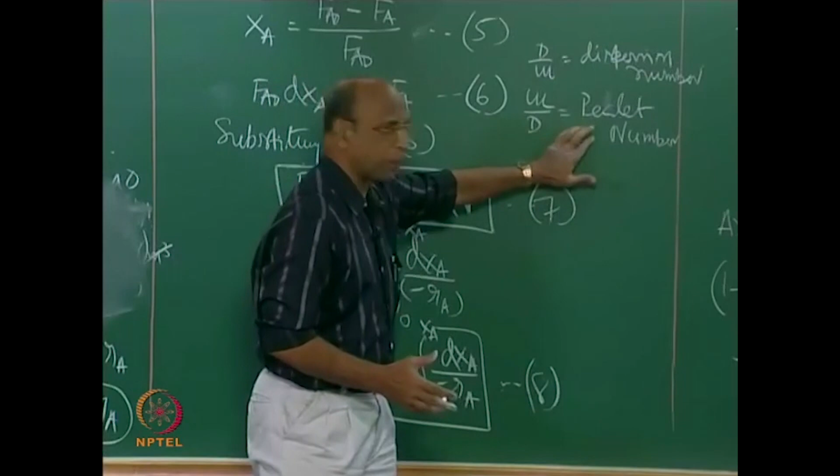High-funda people use this Peclet number, low-funda people like me use the dispersion number, because I don't want to use another subroutine inside my mind. Dispersion number is straightforward: D by UL, D equal to 0 is plug flow, D equal to infinity is mixed flow. So that's what I am trying to explain to you. The beauty in assuming plug flow is mathematical simplification of the problem, but you have to now question how far that is correct.

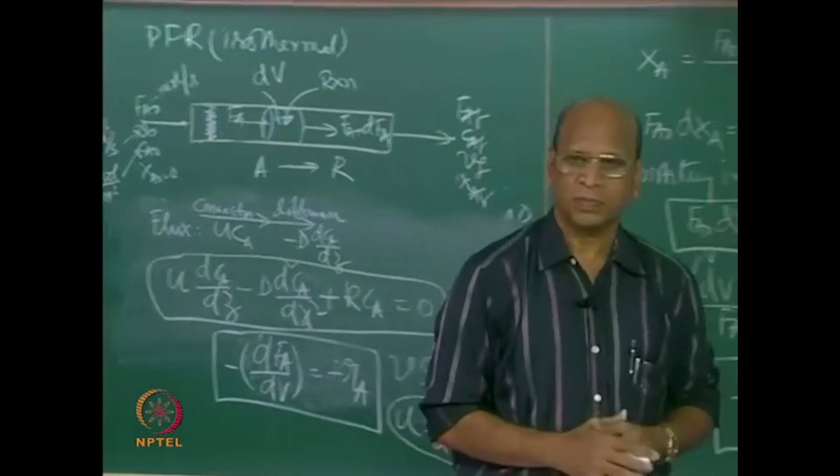Is it really correct? That is correct provided you take small tubes, diameters maybe 1 inch, around 1.5 to 2 inches, and maintain very high velocities. There will be dispersion, you can never neglect dispersion, dispersion will be there. So it is very well valid in packed beds. In packed beds, what is the Reynolds number for turbulence?

No idea? Tell me, when is it laminar? Less than 1 is Stokes law, but that's only for a single particle. In a packed bed, how many particles will you have? Less than 2000? Why 2000? It is 10. 10 and less in a packed bed you will have laminar, and 500 and above you have turbulence. In between you have transition.

But here, how is Reynolds number defined? Diameter of particle. How is Reynolds number normally defined? d V rho by mu. Here the d is diameter of the particle. There the d is diameter of the pipe. So that's how it is defined.

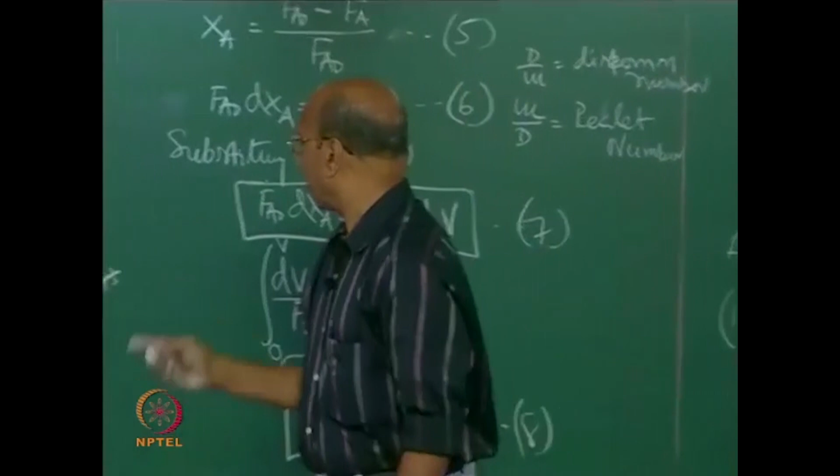So another example - I think today itself I have to give that - is diffusion and convection. I will give you an example so that you will not forget. Two examples I will give.

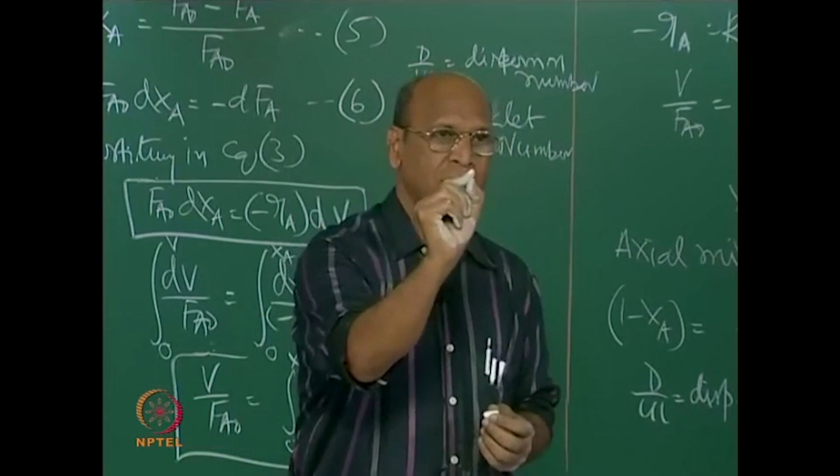Imagine that I have come with a lot of scent spray. Scent means - you may not understand, that is the old word, scent - yeah, spray or deodorant, perfume. And also, by the way, perfumes are made by whom? Chemical engineers, yeah, wonderful reactions - that is low volume, high value product. Low volume, it will be 1 ml and 10,000 rupees. Stay there, can you smell me? If you have to imagine - I don't have right now a spray - if I have all that perfume and then stay there, can you smell?

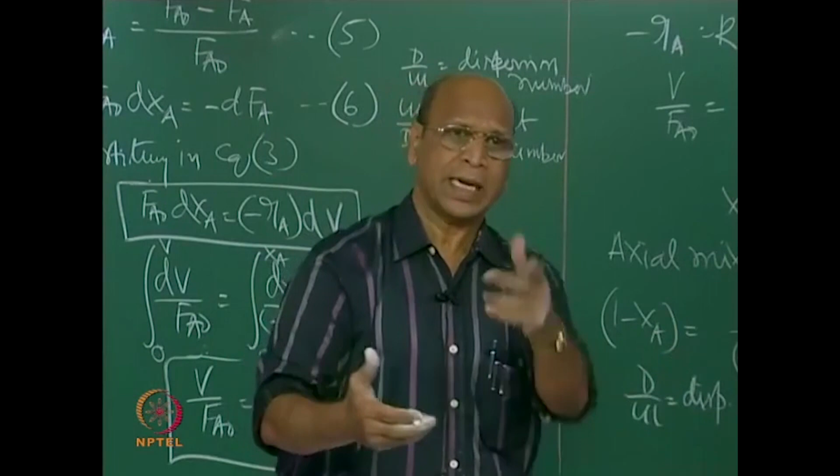Depends on the humidity, why no? At T equals 0 it will take time. What is that time? Depends on the humidity - diffusion. Till then - I did not ask you if instantaneously you are able to smell. I did not tell that. Instantaneous smelling also is there.

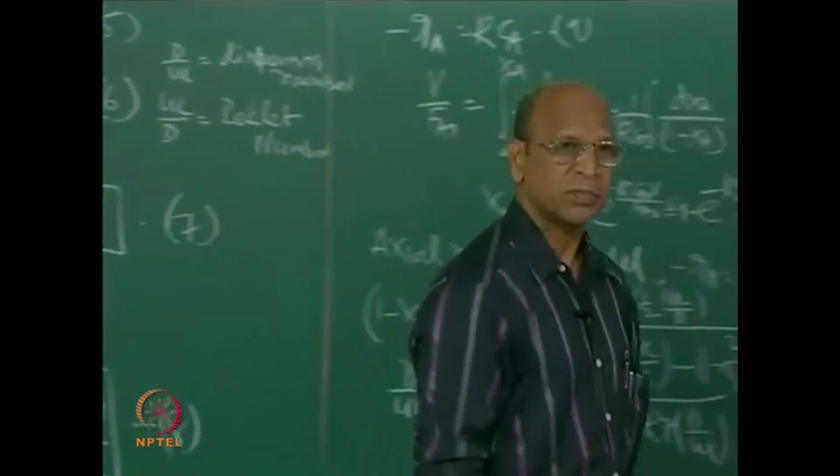The other example I want to give you is the conveyor belt again. Many people are standing on the conveyor belt, that is the convection velocity equivalent, but some enthusiastic people start walking on that, so that is the diffusion equivalent. And what is the concentration difference, the gradient, for them? Because here there is a concentration gradient, but for the people who are walking, what must be the gradient? Maybe they are in a hurry, they have to catch the flight quickly, or they have to move fast, so those people are walking on the conveyor belt. Other people are cool, let it take whatever time, so they stand - that is convection, normal flow. Above that again you have diffusion.

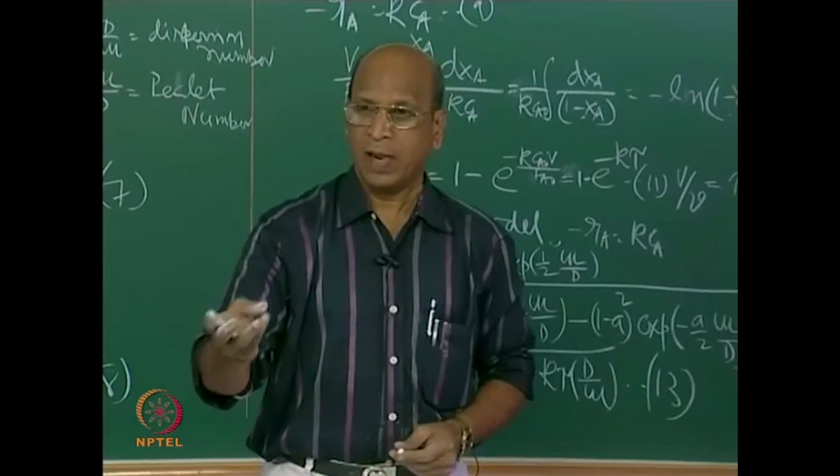So now if you see an Axe advertisement, you should not forget convection and diffusion, and also now if you see conveyor belts, again convection and diffusion. But in ideal plug flow, that diffusion is not allowed. In ideal plug flow, diffusion is not allowed, okay?